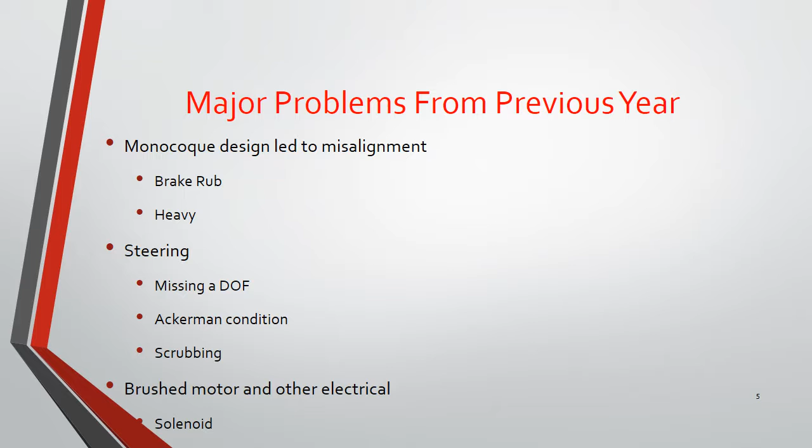So some major things that we want to improve from last year: we want to add an aluminum frame, which will eliminate misalignments and hopefully eliminate brake rub. So our shell ideally will become protective only. We want to change from carbon fiber to polycarbonate shell so that it can be thinner and lighter weight while remaining rigid and protective.

Our steering, we definitely want to add the Ackerman condition, and we want to have a brushless hub motor. This will simplify our drivetrain, and a brushless motor will be much more efficient than last year's. And we want to replace our solenoid with a solid state relay. So again, these are some of the major improvements we are looking to do from last year's team.

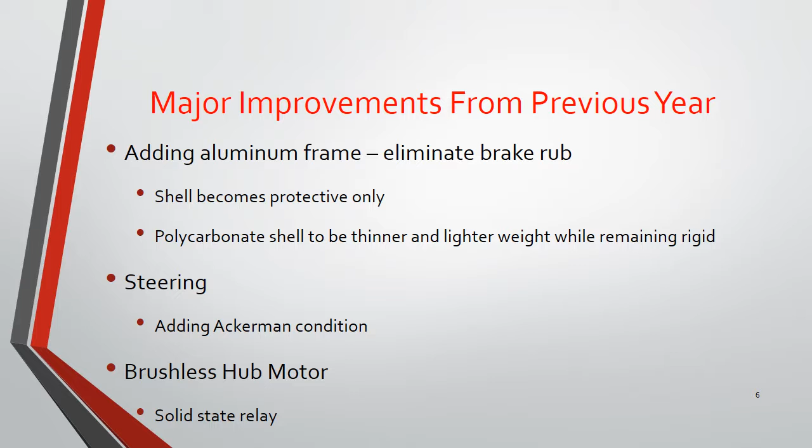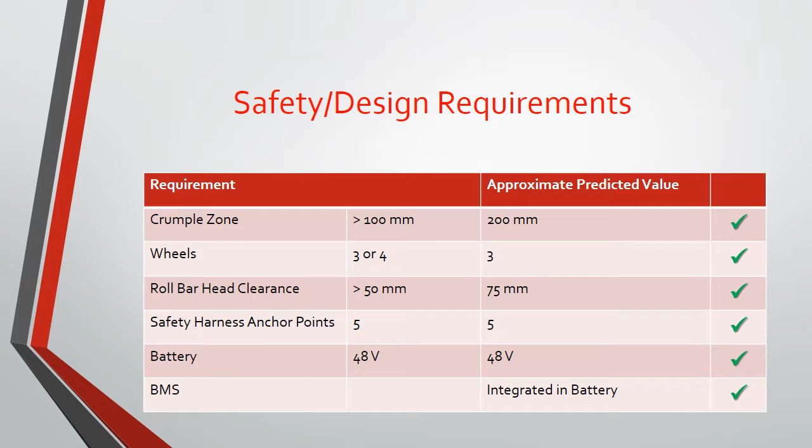Here are some of the safety design requirements that we've already met, and the dimensional requirements that our CAD model already meets. Let's get into some of the CAD. I'm going to start basically breaking down our car layer by layer so you can see all of the features of the car thus far.

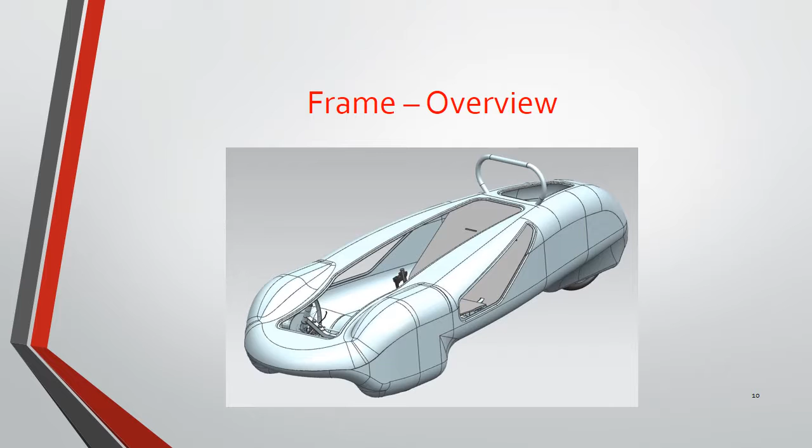Here you can see the car most completed. It has its rather clear polycarbonate shell with a bubble on top. This will be clearance for the driver's head and will give the driver greater visibility, while the roll bar is still around 75 millimeters above the driver's head.

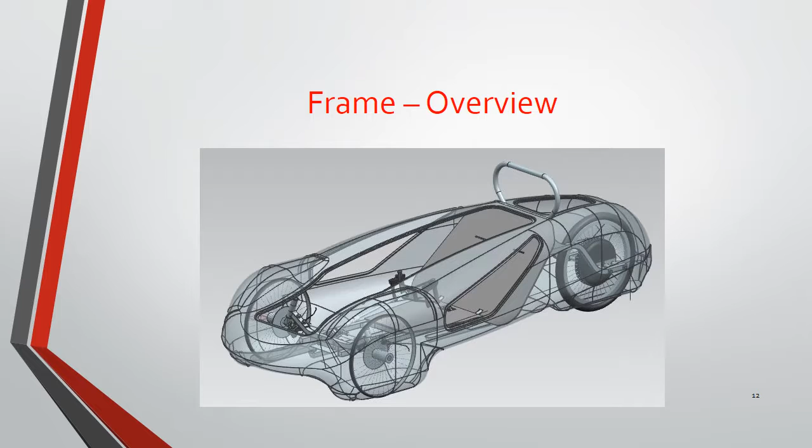Here's the car without any shell around it. This car, we realized, does not have fenders around the wheels. We plan to add those, we just did not have them yet. But the driver does need to be isolated from the wheels with fenders or coverings protecting the driver from the wheels and brakes.

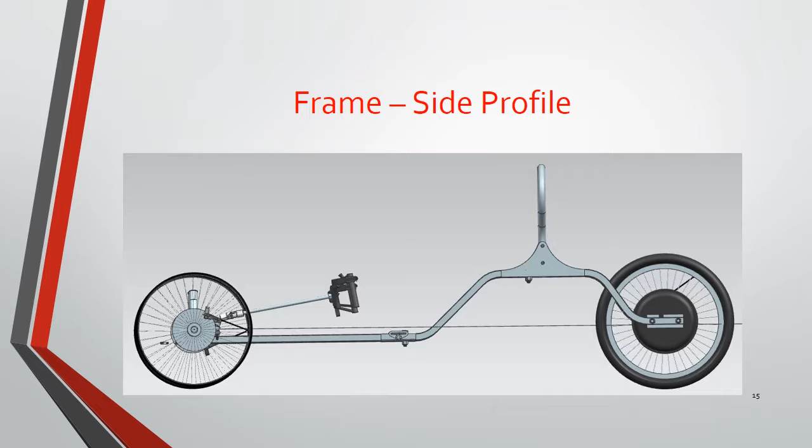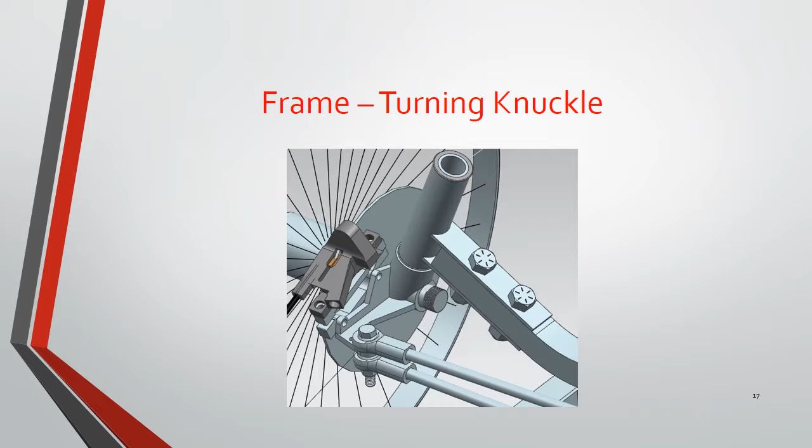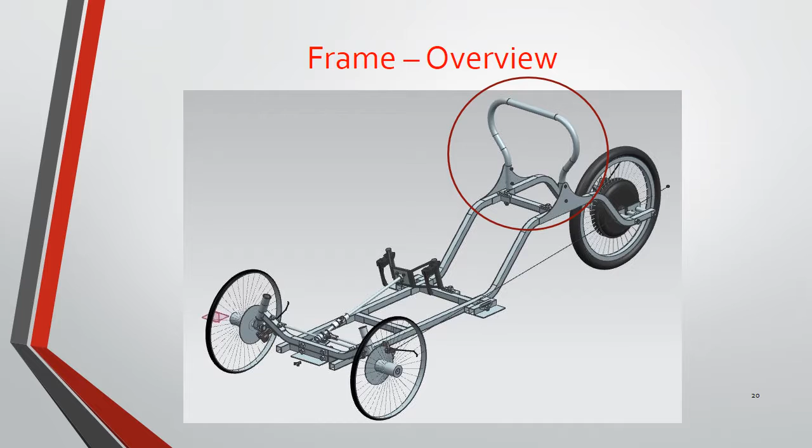Now I'm going to start zooming into different subsystems of the vehicle. The area circled in red will be enlarged to see in greater detail. Here you can see the turning knuckle interface with the brake, the rotor, and some of the steering linkages. Here is the hub motor interface with the rear wheel and the rear part of the frame. Here you can see the roll bar interface with the frame.

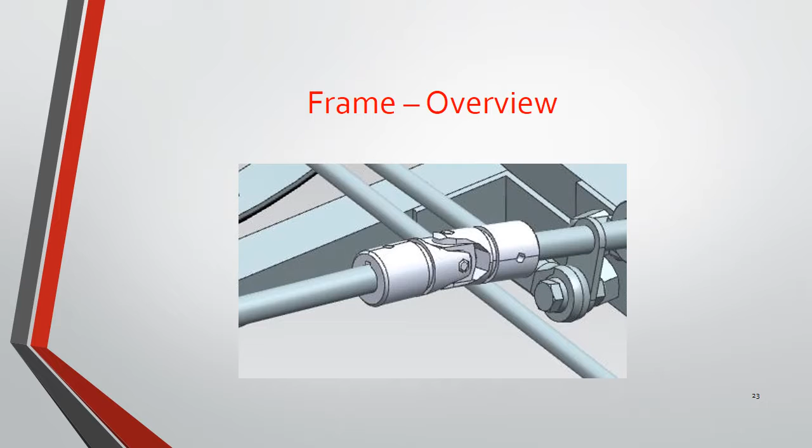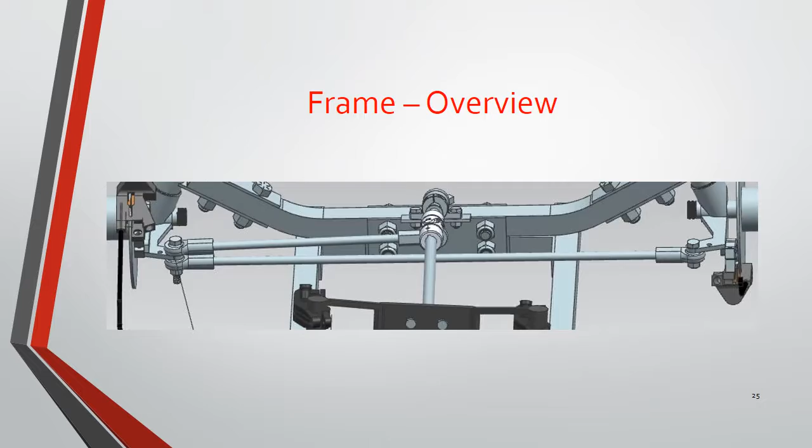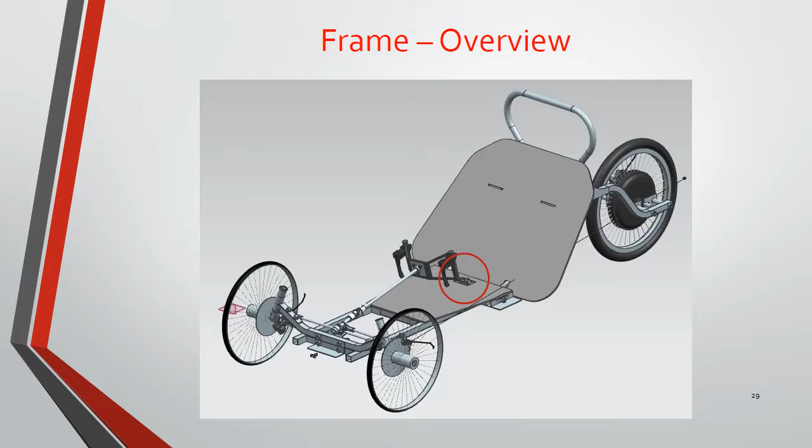Hi, my name is Ben Miller, and I've primarily been in charge of doing research and design for the frame. So I'm just going to go over a few of the key points and what we hope to accomplish with the frame this year.

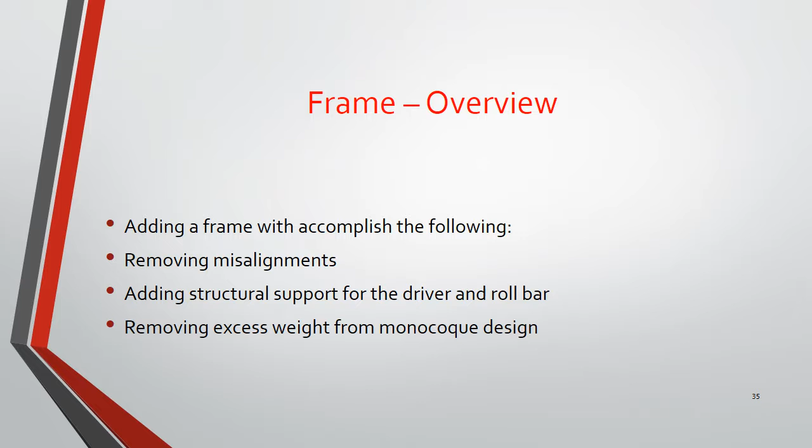So just an overview, we think that if we add a frame instead of using the monocoque to support the weight of the car, we'll be able to remove some misalignments. Also, we can add structural support for the driver and the roll bar, and we also want to reduce excess weight caused by the monocoque. So if we use a frame and we make that light enough, we can decrease the weight of the shell and overall decrease the weight of the car.

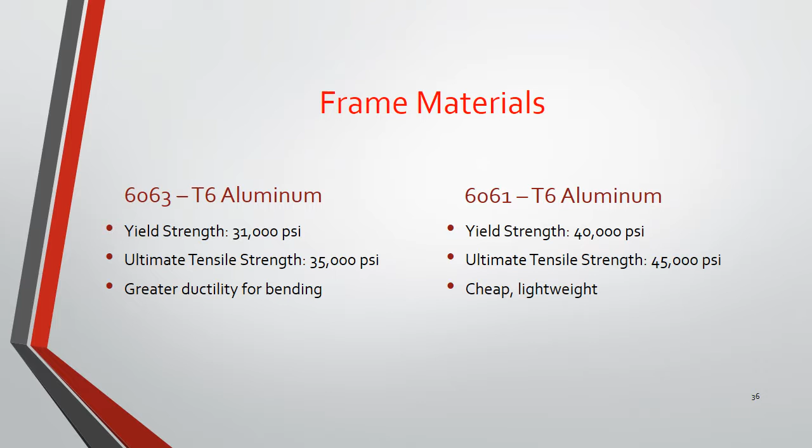For the frame, we're using 2 types of aluminum, 6063 and 6061. The 6063 is used in places where we have to do bending, and the 6061 is used everywhere else. In order to fabricate the joints for our frame, we'll be using Scotch-Weld DP420, which is a 2-part epoxy. What this epoxy does for us is gets rid of the need for our team members to TIG weld.

The epoxy itself is rated for 4,500 psi, but when doing some tests in-house, we found that we were able to get it to hold 2,300 psi. So based on those results, we're using an average contact area per joint of 8 square inches, which is going to give us well over the amount of strength that we're going to need for each joint.

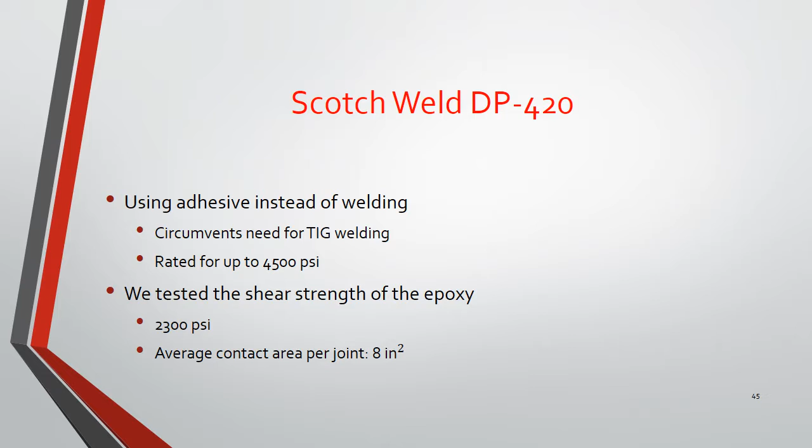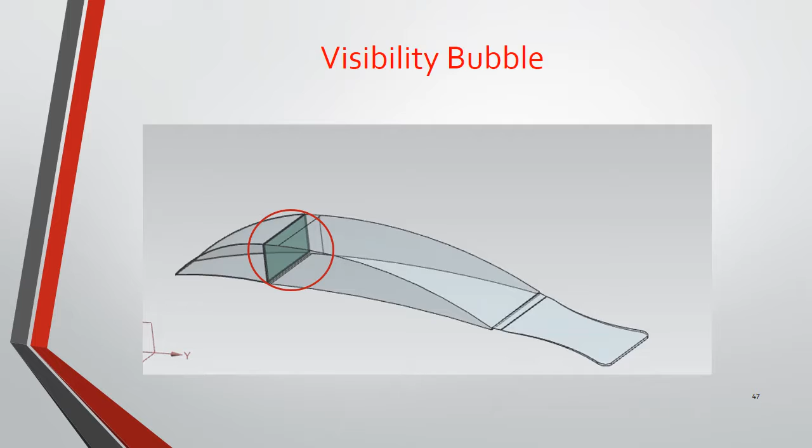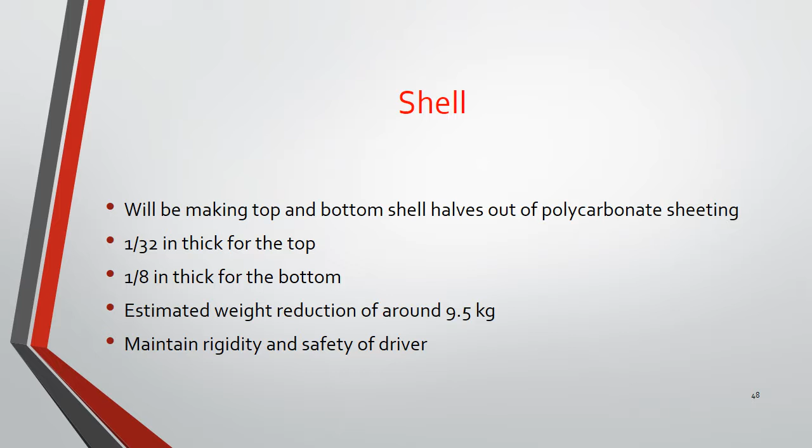Going deeper into the shell, we'll be talking about the top and the bottom. The top and the bottom will be made out of polycarbonate. The top will be 1/32 inch thick. The bottom will be 1/8 inch thick. The estimated weight reduction from a carbon fiber shell will be 9.5 kilograms. The polycarbonate will maintain its rigidity and safety of the driver as compared to the carbon fiber shell.

Hello, I'm Zach Rowland, and I'm in charge of the steering on our car. For the steering on our car, we plan to use a 4-bar linkage which will connect our left turning knuckle to our right turning knuckle. Also on our left turning knuckle, we will have another rod that is connected to our steering column. The steering column will have a pitman arm attached to it, which when turned will turn the left steering knuckle and right wheel.

Lastly, on our car, we plan to utilize the Ackerman geometry in order to reduce the scrubbing, which caused issues from last year.

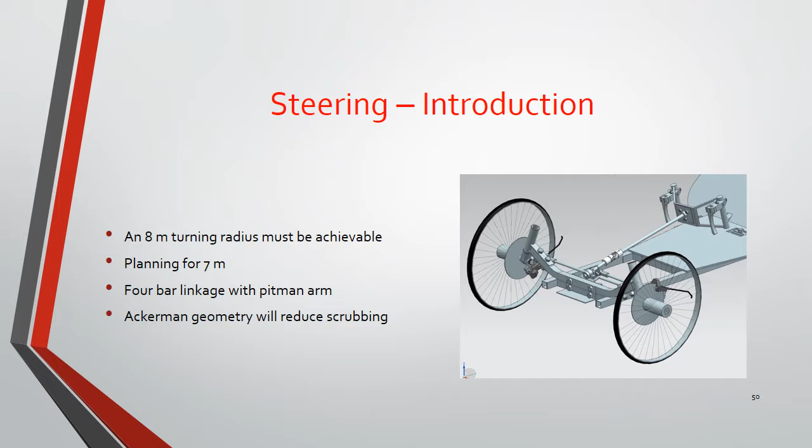Hi, my name is Jordan Lolito, and I'll be talking about the brakes. The group has heard of the infamous brake test, in which the front and back brake systems must be activated independently of each other, while the car sits on a 20% grade. The group will use hydraulic disc brakes for both the front and backs and will create a custom splitter for the front brakes. The brakes will work in conjunction with a 160mm rotor.

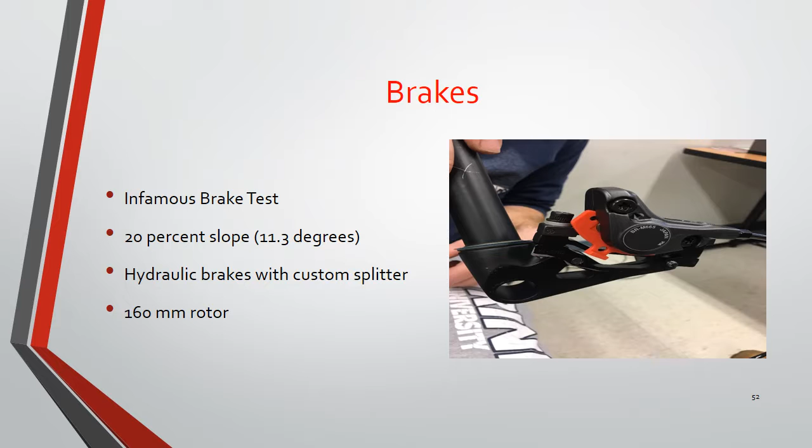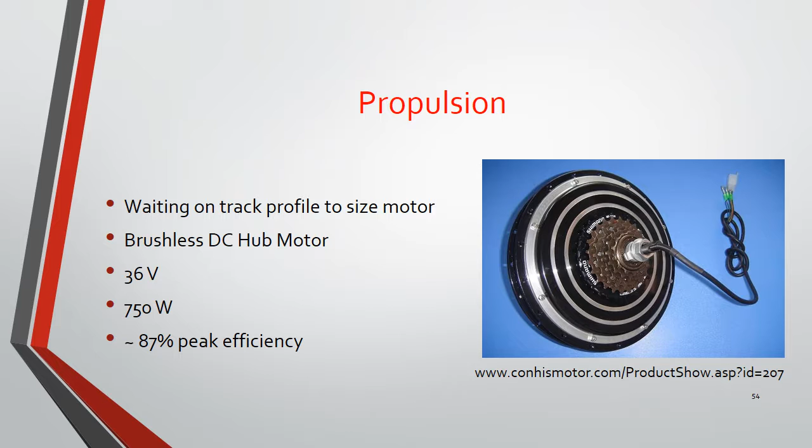It will support a 160mm rotor for our brakes. It's 36 volts, 750 watt input power, and its peak efficiency is roughly 87%, where its max torque is 42 Newton meters.

This is Spencer Faull, here to talk about our motor controller and the electrical schematic for our vehicle. This year we're planning on integrating a brushless hub motor compared to the brushed chain drive system that was used in last year's car. We're designing our own motor controller, and we're currently on our second iteration. We're attempting to develop two designs concurrently.

One comes from designs that were given to us by Duke University, but we haven't gotten as far on those designs yet. The ones you're about to see in the schematics are based on a Stanford motor control lab. It utilizes the DRV8332 motor driver to create the proper signals to run a three-phase BLDC motor.

The horn circuit comes before the joule meter, as we don't have to measure the amount of energy going through the horn circuit. This all leads up to the driver kill switch, which is attached to the activation side of the solid-state relay. On the power side of the relay, we have the motor control circuit, which contains the motor and this black box controller, which you're about to see in more detail.

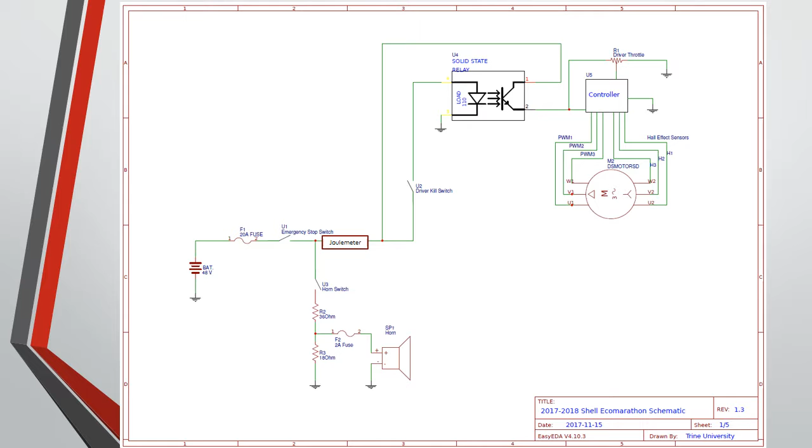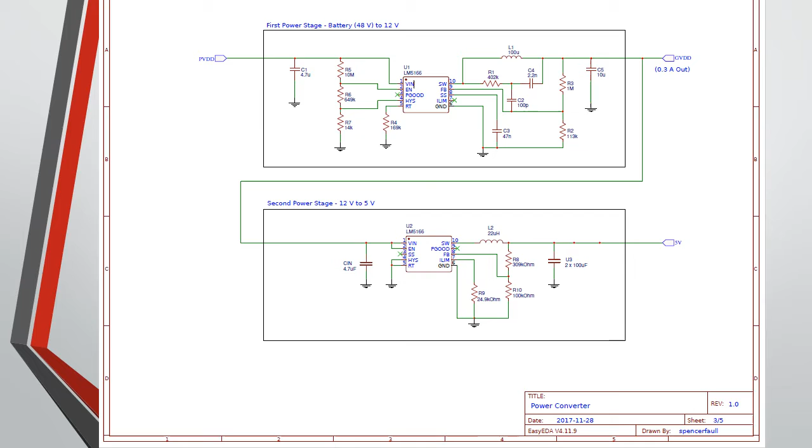This schematic is an overview of the controller circuit. I'll show all of these in more detail as we go. The power converter board uses two buck converter circuits to provide 12 volts and 5 volts from the battery voltage of 48 volts. These power converter circuits basically come straight from the data sheet of this buck converter chip. The 12 volt source then goes out to the driver board, and the 5 volt source powers our microcontroller.

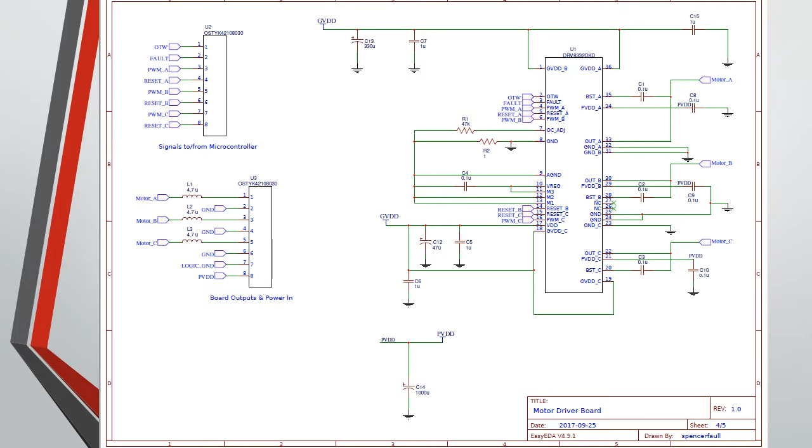This schematic shows our driver board. The DRV8332 chip contains FET H-bridges, which are internal to the chip. It receives PWMs and reset signals from the microcontroller and uses these signals to output proper signals to the motor that are at the battery voltage. The inputs and outputs to this board go through isolated screw terminals.

And this final schematic shows which signals are traveling to and from our Teensy 3.2 microcontroller. The Teensy receives position data from the motor's Hall effect sensors and uses that data to send the correct PWMs and resets for commutation. It also receives fault signals from the driver board, and it uses an internal ADC to read the throttle potentiometer, which adjusts the output duty cycle.

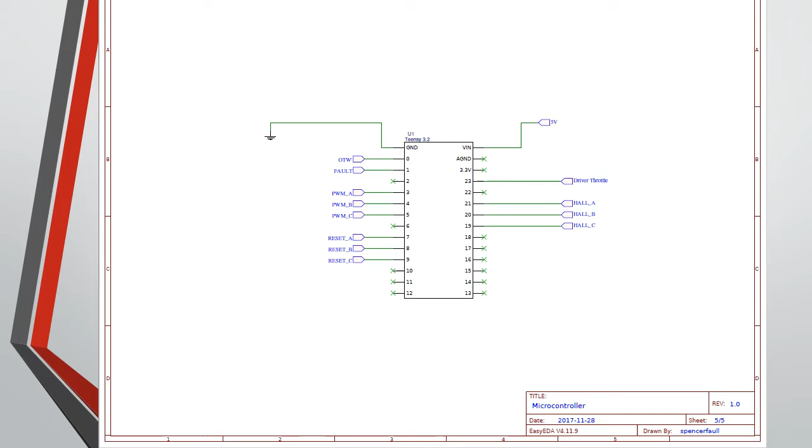This is Caleb again, covering the battery/battery management system. This year we will be using a 48 volt lithium ion battery. It'll be a 10 amp hour battery with a built-in battery management system that will allow a maximum of 50 amps. And this will be purchased from Electric Rider. We stuck with the same vendor as last year, where we used a 36 volt battery, but this year we decided to go with the 48 volt. But we were attracted to this battery because it has the built-in battery management system.

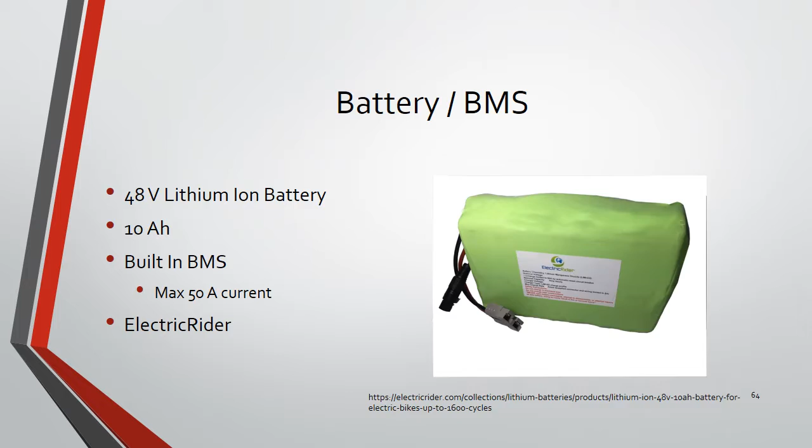Our team was also able to roughly predict our performance for this year. We put our last year's car in a custom dynamometer. We analyzed the losses from the drivetrain, wheels, motors, electrical, etc. And then we modified the losses that we found there to model that of an ideal design for this year. Assuming projected improvements, we lessened some of the losses. A lot of them went near to zero, especially things like brake rub, because we expect to eliminate that completely.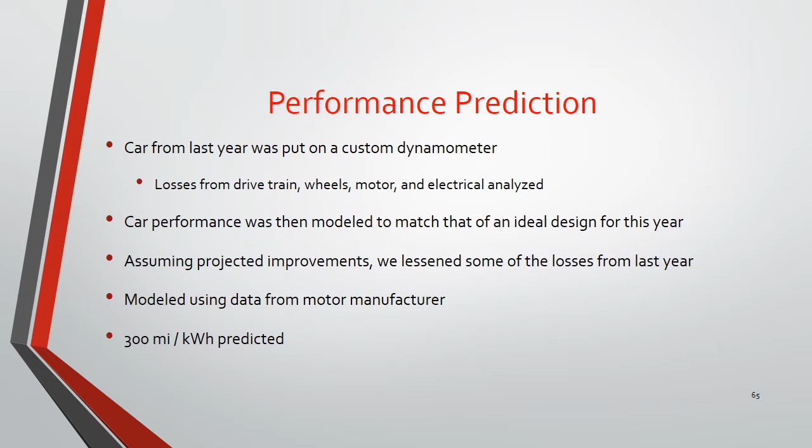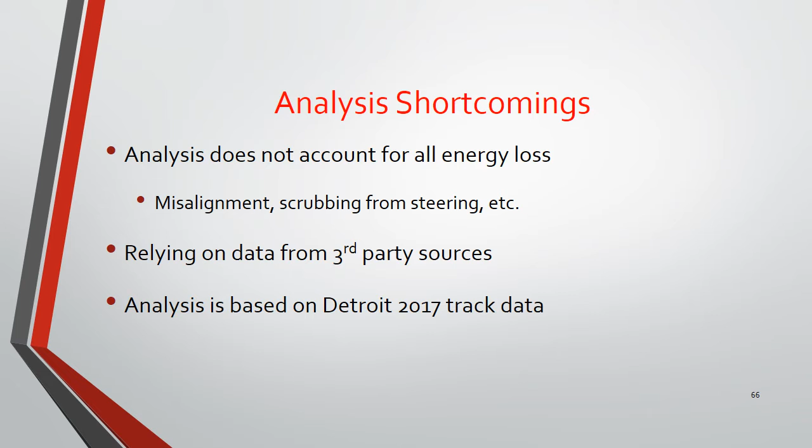Then we also imported data from a brushless hub motor manufacturer, and we found that we can achieve 300 miles per kilowatt hour. Now we know that this analysis will have some shortcomings. This does not account for all energy loss. Misalignments, scrubbing, things we cannot necessarily control down to a zero loss level are not accounted for in this analysis. We're also relying on data from third-party sources, and this analysis is based on a track from Detroit 2017, so it will be different for this year.

So to conclude this video, we understand the safety and technical requirements for the competition. We will definitely be making some significant improvements from our performance last year. We should have a physical car by the end of January for testing and to improve for any unforeseen issues that we may have.

And our analysis shows that we should achieve around 300 miles per kilowatt hour, although we know that this is more than the first place team from last year. We predict that it will be lower than this because of shortcomings in our analysis and energy loss that we cannot model.